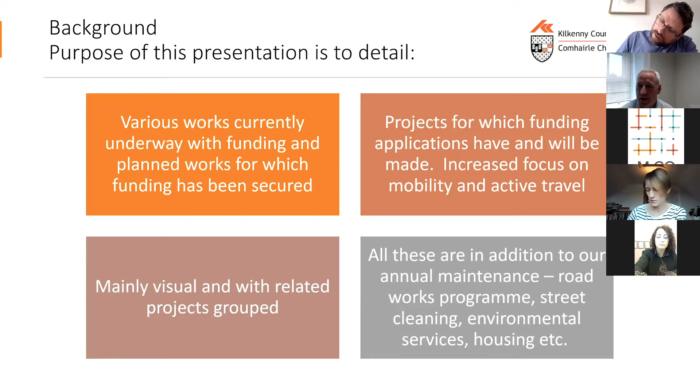It's mainly visual, so it's pictures, and if you want to ask questions at the end, that's no difficulty. All this is about mobility and active travel, but it's also about placemaking, making the city centre as comfortable as we can for pedestrians, for people to come in and enjoy, and to try and revitalise our city centre. A lot of the projects we undertook during COVID over the last year have complemented this.

On current projects, we currently have a small bit of work to do on Parliament Street, which involves enhanced footpaths and the pedestrian area, and resurfacing Parliament Street itself. We just have to finish off a little bit of work at the Market Cross car park.

Our proposal, and we have planning and funding in place for it, is to make it one way coming into the city, having counterflow cycling, so you'll be able to cycle both ways comfortably in and out. They'll be segregated, and you will also have wider footpaths. In places, the footpaths here are about 1.2 metres wide, whereas the recommended minimum is 1.8.

We also have Part 8 approval and have secured most of the funding to permanently put the one-way system into Ormonde Street, and to revitalise that area as well, upgrading it to make it more comfortable for pedestrians and cyclists.

We have plans as well, and we're appointing a consultant over the next 2 weeks for the upgrade of Kieran Street, St Mary's Lane, and to make the outdoor seated area in the Market Yard a permanent feature. That's where we removed 23 car parking spaces in the Market Yard and replaced them with a seated area. We'll be looking to permanently put that in place with a suitable cover that will allow people to sit out all year.

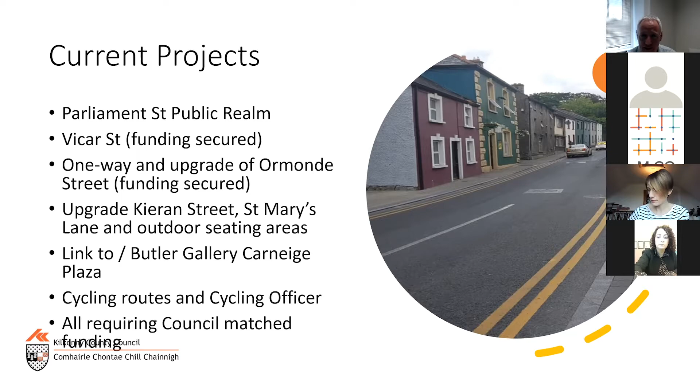This is, I suppose, two projects that will be completed this year.

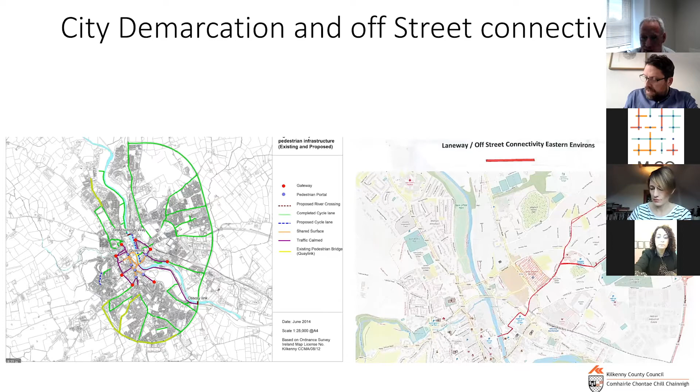So on the next slide is an indication of some of the COVID measures that we implemented to help with the public health pandemic. The biggest emphasis for us was to make sure that as people came out into the streets of Kilkenny when shops reopened in June and later in the year, there was adequate space for pedestrians and for people to move around comfortably.

So we implemented a one-way system on Rose Inn Street and High Street, and two-way on Bateman Quay. This has been largely successful. There were a number of implementations we had to do to improve matters, like making the traffic lights smarter - if there's no cars at a certain traffic light on Patrick Street or Rose Inn Street, they'll stay red and give priority to where there are a number of cars coming. That's one of the ways we improved the flow of traffic, but also facilitated wider pedestrian areas on High Street and Rose Inn Street in particular.

We also pedestrianised James Street from 10 in the morning until 9 in the evening, and extended the pedestrianisation of Kieran Street as well. We had a farmers market at weekends on the parade, artists on the Mayor's Walk, additional pedestrianisation in Kieran Street and James Street, the outdoor seated area in the market yard, and we changed some of the parking areas on Castle Road, which was bus parking only, to car and bus - to encourage people not to come right into town if at all possible. Also on Wolfe Tone Street, we made it an hourly car park to encourage a turnover of customers into John Street.

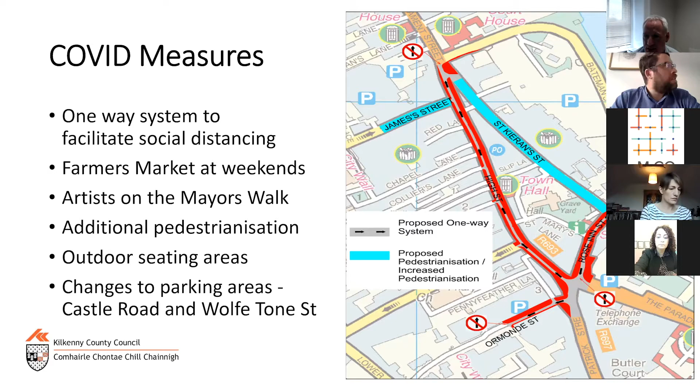So those were the COVID measures. A lot of them proved very successful, and we'll be looking to extend them into the future. So on the next slide then.

Currently within the city core, the current work we've done is on pedestrianisation, the farmers markets, the seated area, and changes to the car parking facilities.

For the future, we're going to look at the city centre traffic management plan, with an increased focus on pedestrians, cyclists, and public transport. That's the way every town or city of our size is going to be moving into the future.

As part of the development plan, we're preparing a transport plan for the city itself, which will examine connectivity north and south of the city centre. Within the city centre itself, we'll be putting in place a traffic model that will indicate how the one-way system could work if we permanently put it in place, and what streets should and shouldn't be included. We'll have a lot of learning from the traffic model.

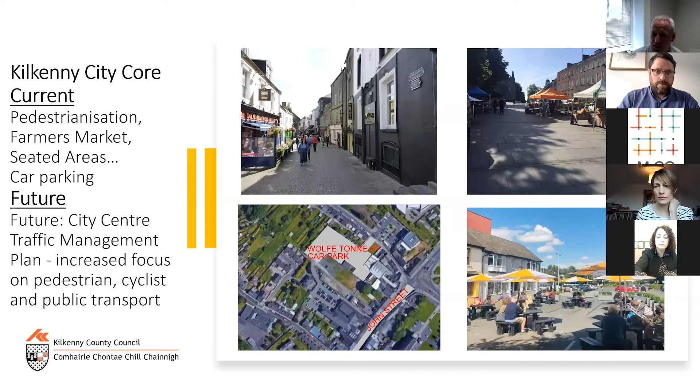Once the transport plan is done, we'll be putting a traffic model in place, and we'll come up with a design for how traffic will move in the city centre in the future. So if we move on to the next one.

Cycling and pedestrian bridges, additional ones north and south of the centre - between John's Bridge and the Ossory Bridge, connecting over onto the St. Canice's or HSE site on the Dublin Road, and similarly down at Riverside Drive on the northern end of the city across to the Bleach Road and that area.

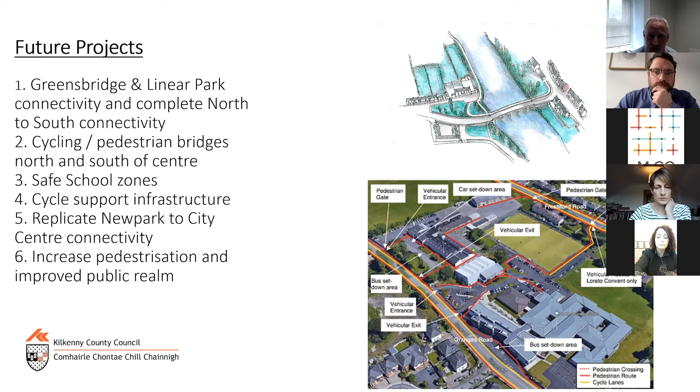We want to replicate the Newpark to city centre connectivity from Loughboy, from the western environs, and from Loughmacask or the northern side of Kilkenny City as well, to increase pedestrianisation and improve the public realm within the whole city itself. Okay, move on to the next slide.

The picture on the left is one you saw already, and on the right is some of our cycling manuals, showing the type of crossings you'd have at school. That's what we'll be aiming for, and we'll be looking at implementing those at all our schools throughout the city and the county.

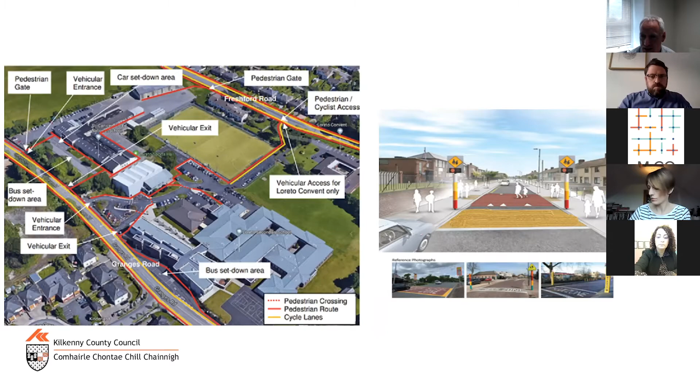The other part is we're lucky enough that we got our city bus service in. We have two routes within Kilkenny City itself, the green and the red route, which connect from the Castlecomer Road to Loughboy, and from the Dublin Road to St. Luke's Hospital.

Both of those are up and running at the moment. We're unfortunate that COVID came in at roughly the same time, which did impact on usage. But we would look to expand that into the future to bring in more areas served by the city bus service. We're conscious this is not a short-term measure, it's not going to be an overnight success.

If you're familiar with Waterford, when we saw the city bus service down there initially, there was never too many on it. But I think now you'll never see a bus that's less than half full. So that's to be encouraged, and we will be looking at expanding this with the NTA into the future.

The other thing we're doing is we have the Breagagh Valley on the outskirts, on the western side of Kilkenny City, which is the next area for development of housing. Over the next 10 years there'll be 3,000 houses developed in this area, which will serve to accommodate anybody who's going to come and work and live and enjoy Kilkenny life, particularly with the development going on down in the Brewery Quarter at the moment.

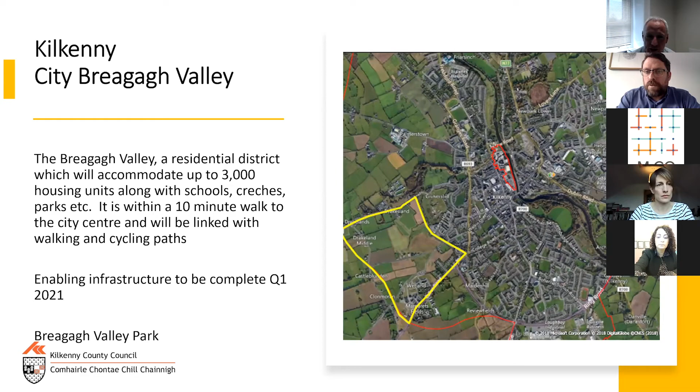What we'll be doing there as well is trying to link that in along the Breagagh Valley so that you can cycle or walk into town off-road in the future. A lot of the development in this area will be well supported by cycling infrastructure. The street being put in at the moment will have segregated cycling and pedestrian areas, which is great when developing a new site like this. It's not as easy to do in the city centre where you're confined by buildings and narrow streets, so we have to come up with other creative ways of encouraging cycling and walking in those areas.

Going on to the last slide, just to make you aware of the Abbey Quarter, there's a huge focus in the Abbey Quarter for walking and cycling. It is going to be, as much as possible, traffic free with limited parking down there in the future.

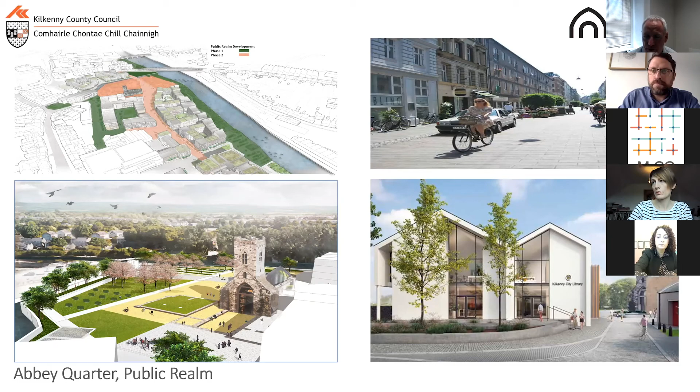It'll be bordered on the north side by a Riverside Park, and our intention is that will connect down onto Riverside Drive, down through Greensbridge, and there will also be a substantial green or park in front of St. Francis Abbey Brewery. The brew house was due for completion early this year, but that's now back again with COVID, though we're hopeful it will be completed in Q3 2021.

Kilkenny has had over 5,000 of 10,000 lights changed to LED lighting, which makes it safer for cycling and walking, for pedestrians and for all road users really. The overriding focus of the public lighting replacement project is energy efficiency, but it has huge added benefits for road safety from a cycling and walking point of view as well.